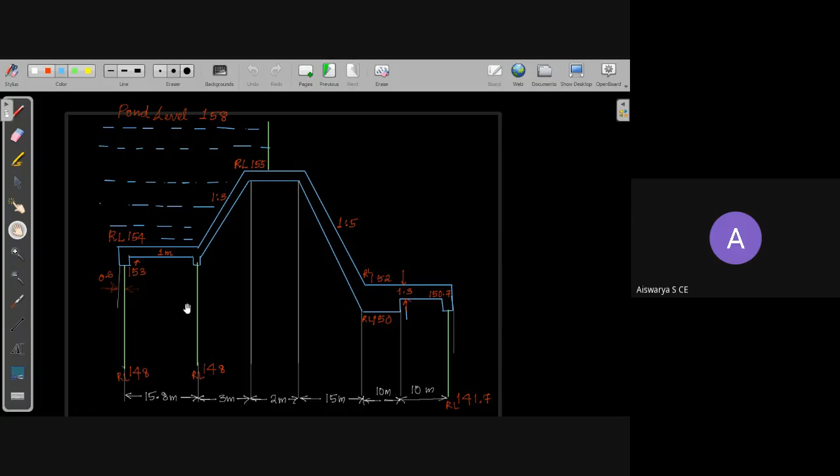So this is the problem. You have a weir having this upstream impervious floor, and there are two cutoff walls at the upstream side and one cutoff wall at the downstream end.

So these green lines represent the sheet piles, and the depth of cutoff wall and the height of water levels are represented using reduced level.

So this is the pond level. Pond level means a high flood level. Sorry, full supply level. Pond level is 158 meters.

Then at the base, or at the crest level of weir, the RL is 155. Here it is 158, 155.

So that you can analyze what is the height of shutter: 158 minus 155. Likewise, at every floor level and crest level, they have mentioned the reduced levels.

So accordingly, you have to calculate the length of sheet piles and thickness of the floor. Copy this figure and we'll start with the problem.

Let me know once completed.

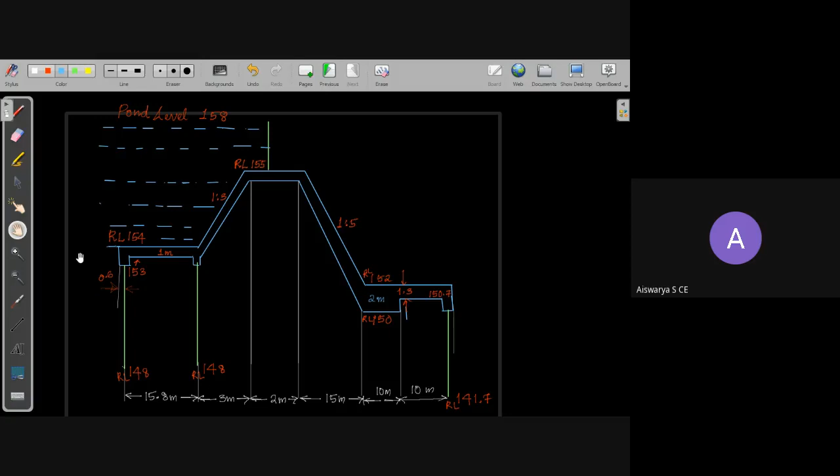Okay, then we shall start doing the problem. First of all, you have to find out what is the question: determine the various percentage pressure at key points in this figure.

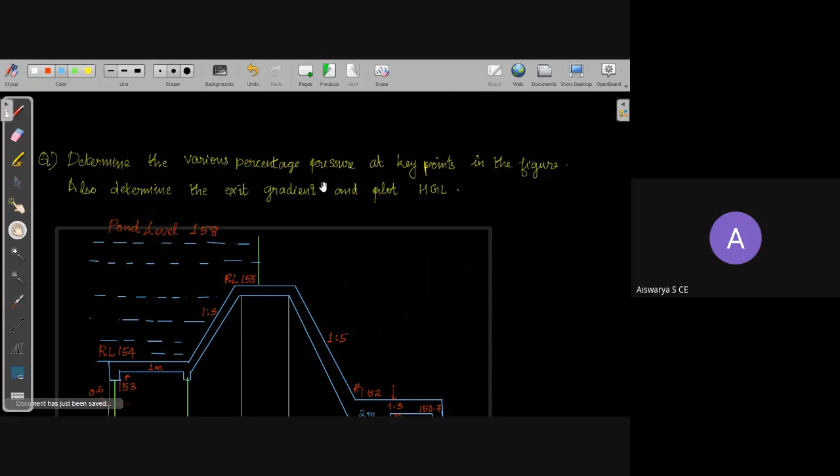So you need to find out the percentage pressure. From where will we get the percentage pressure? From the Khosla chart. So accordingly, you need to find out first of all the total horizontal length, which is small letter b.

You can calculate what is small letter b. Small letter b is the total horizontal length of the weir.

So total horizontal length of the weir means, when you look into the first sheet pile, you can see it is located at 0.6 meter from the starting point.

So when you find out the total width of the floor, width of the floor is 0.6 meter from here.

Then plus 15.8 meter, plus total length - total horizontal length is small b. Then 3, again 2 meter, 15 plus 10 plus 10. This is the total horizontal length of the weir.

How much is this value? Again here also there is another 0.6 meter.

First, the upstream and downstream sheet piles are located after an eccentricity of 0.6 meter.

So don't forget to add that value. So again 0.6.

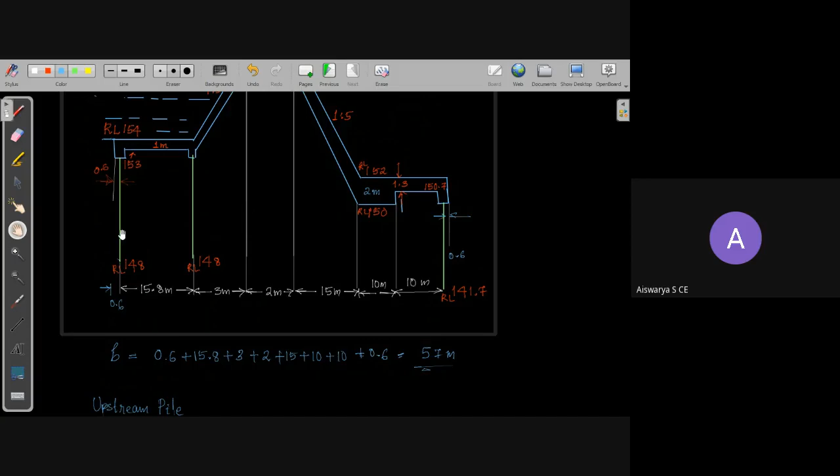Just show what is the length of the weir, length of the first cutoff wall and the key points, as a simple profile.

This is the first pile, and I'm going to represent the values or the key points: this is E1, this is D1, and C1. So you need to get what are the percentage pressures at these key points and what is the depth of this cutoff wall.

Depth of cutoff wall means we need to find the depth of cutoff wall from the top level of the floor. Always you have to find out the depth of cutoff wall from the top level of the impervious floor up to the bottom of the cutoff wall.

So here, what is the reduced level at the top level of impervious floor? It is 154, and at the bottom RL is 148. So 154 minus 148, we'll get the value of depth of cutoff wall. This is small d equal to 154 minus 148, how much? 6 meters.

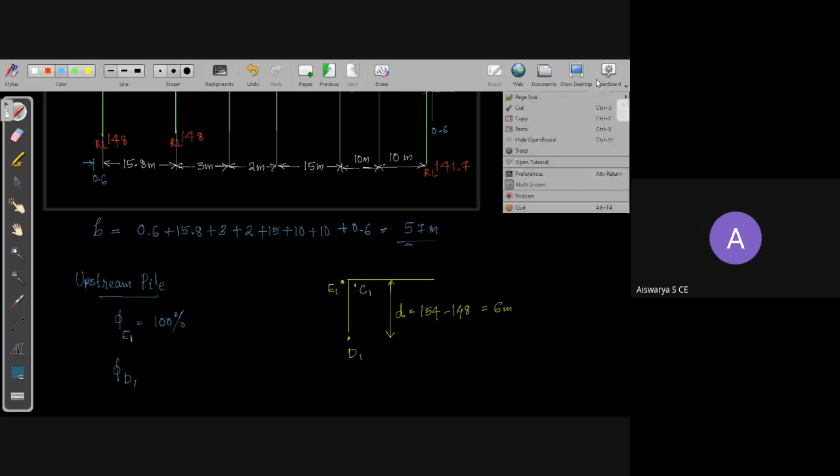Next, you need to find out what is phi D1 and phi C1 from the Khosla chart. I hope everyone has the copy of Khosla's chart at least in your phone, so just look into that chart. So you need to get phi D1 and phi C1.

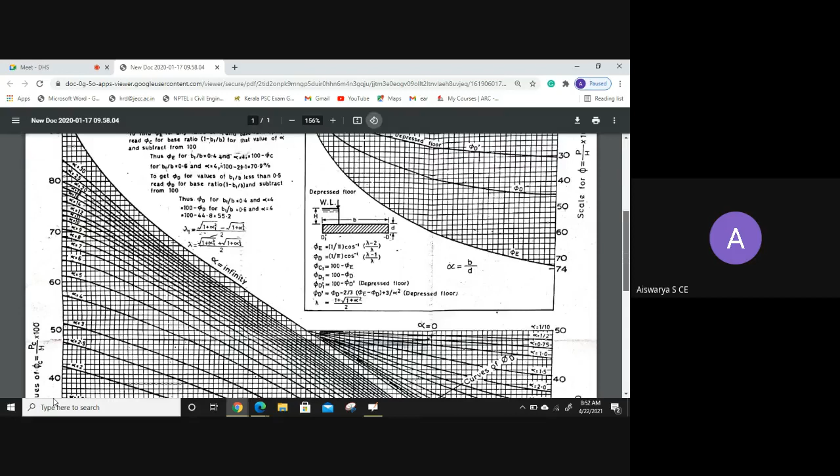This pile is upstream pile, so you need to consider this right chart. This chart is for upstream pile and downstream pile. Now we are doing for upstream pile, so you have to consider this set of chart.

Then here one axis is what? The x-axis is 1 by alpha, which is equal to d by b. So you need to calculate what is the value of 1 by alpha.

1 by alpha equal to d by b. D is the depth of the sheet pile we have considered - here it is this first sheet pile having a depth equal to 6 meter, and b is the total horizontal length of the floor. So d by b is 6 divided by 57. What is the value of 1 by alpha? 1 by alpha will be equal to 0.105. Now we have got the value of 1 by alpha.

You need to find out, first we are going to find out phi d1, with 1 by alpha equal to 0.105. You have to locate that point in this chart.

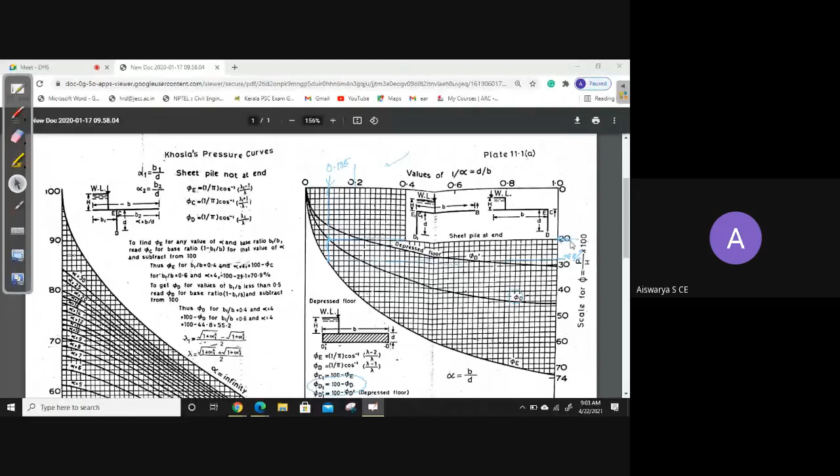And you coincide that with the phi D chart, and coincide with the phi E chart, extend that to the y-axis. You will get the value for percentage pressure for phi D and phi E. Substitute those values in this equation, you can get phi C1 and phi D1. Is it clear for everyone?

Now we have found out the percentage pressure. Then what is the next step? Once you got the percentage pressure, is that value the accurate value? We have to give certain corrections.

We have studied corrections. So for each pile individually we will find out the corrections, and write them as corrected values. So for this upstream pile we have found out phi E, phi D and phi C. Now we need to get the correction value, which you need to add or subtract from this percentage pressure to get the corrected value.

Phi E1 correction is not needed. There is no need for correction for phi E. And also phi D1 - considering phi D1, it is the bottom key point. For this D1 point we did not mention any major correction.

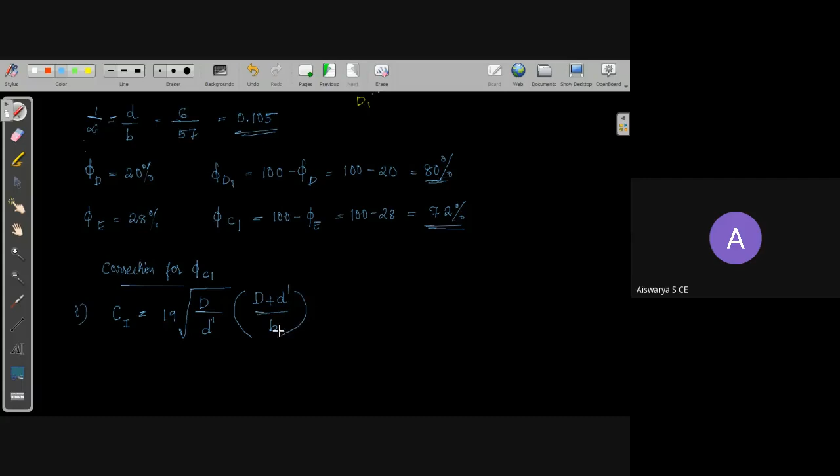What is the equation for correction Ci? 19 times the square root of D by d dash, into D plus d dash, divided by b. This is the equation to find out the correction for mutual interference.

In this, what is the value of d? What was the definition of D? D is the distance between the point at which interference is preferred to the bottom level of pile. That is, this is the key point, or the point we consider, which is C1.

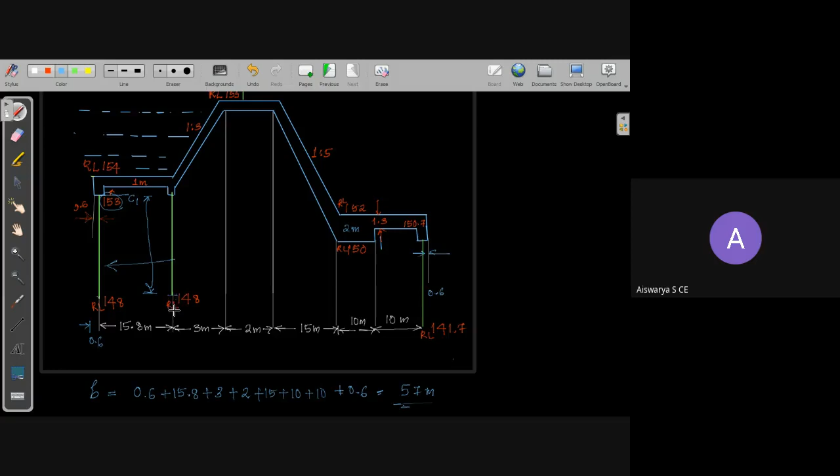So you should take the bottom line of the floor. At this bottom line, what is the RL? RL is 153. And the bottom level of this pile, the sheet pile causing interference, is RL 148. So you can calculate what capital D is.

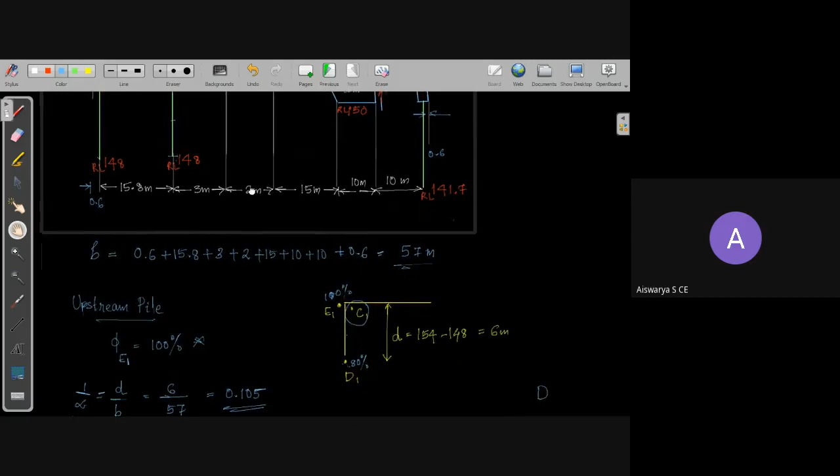Now, what is the small d dash value? Small d dash is the vertical distance from the point of reference towards the bottom of the same pile. Whichever pile the key point is in, from that key point to the bottom of the same pile - that depth. It's the same here - the key point is 153, because both these piles have the same length.